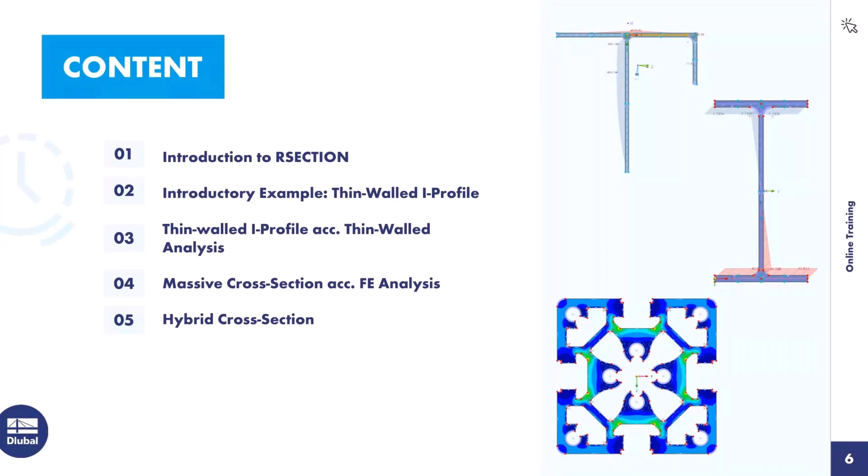So, Sonja, just an interruption. We can see the PowerPoint slide and not the RSECTION window. Ah, I will share the other screen. Ah, that's quite better. Thank you. Okay, sorry for that.

Here on the left are the navigators, and the first navigator is the data navigator. The data navigator manages the input data. A double click on an entry opens the dialog. I can show you this now. If I double click on the point, then the dialog for editing the points will open. However, the dialogs for creating objects can also be called here. Just right click on points, for example, and then it's possible to create a new point.

The display navigator controls the graphical display in the working window. If the checkbox in front of an entry is unchecked, this object is hidden in the graphic. If I uncheck the points here, then you will see that the points will not be displayed anymore. If I check it again, the points will be shown.

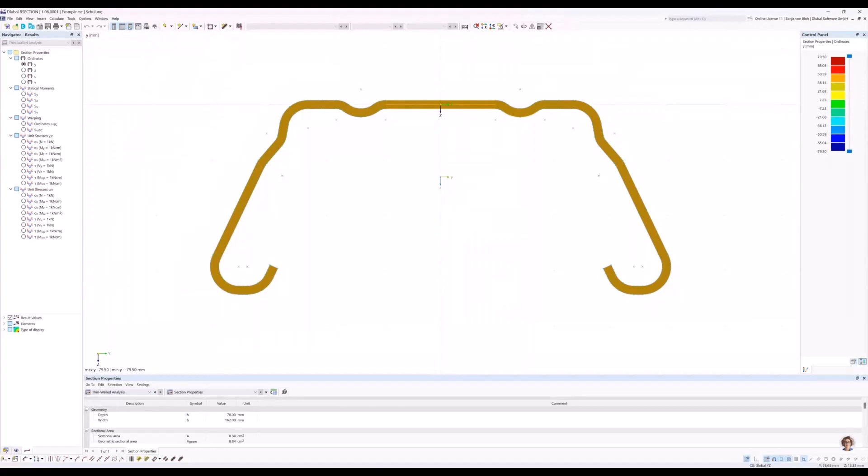Here, I select the whole part. And to remove objects from the selection, hold down the Shift key. Here, I deselect the part. For the first part of the training, I'm now starting a survey again.

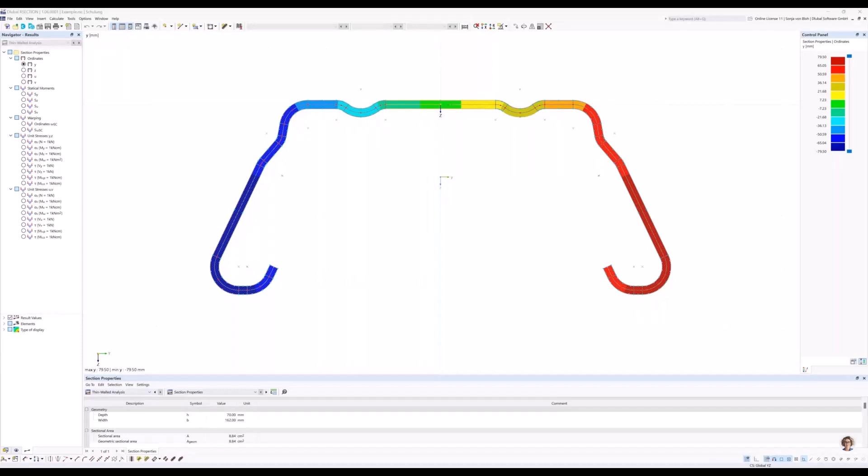Sonja, sorry for the interruption again. Would you like to show the PowerPoint slide or RSECTION? I just wanted to show, maybe there's a problem with which monitor I share. So maybe...

Yes, you should see now the dialog to edit the base data, so maybe it's a problem. You should see it now. Yes. Thank you, sorry. Okay. We changed our training interface now, so I apologize for this. I have to learn it. Okay.

Okay, I've chosen the analysis method thin-walled analysis here, and I've activated the add-on effective steel aluminum section, and I've chosen here the standard Eurocode 3 Part 1.1.

The selection of the design method or standard is irrelevant when using the cross-section in RFEM or RStab. You can select the design method in RFEM RStab regardless of what is set in RSECTION. Furthermore, the subpanels are generated in the design modules based on the standard selected in the design add-on.

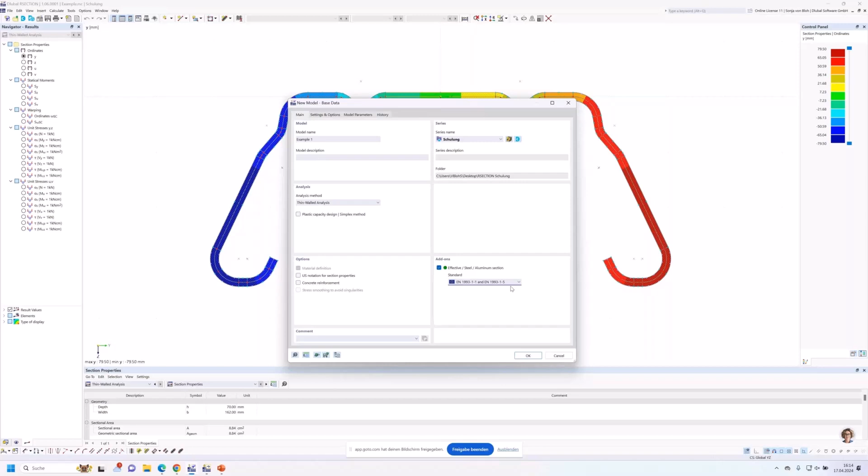On the steel design add-on, the manufacturing type determines which part of the standard is used for the design. You can select the manufacturing type here, and here it's also possible to define the buckling curves.

For cold formed sections, the standard Eurocode 3 Part 1.3 is used, and for hot rolled or welded sections, the standard Eurocode 3 Part 1.1 is used.

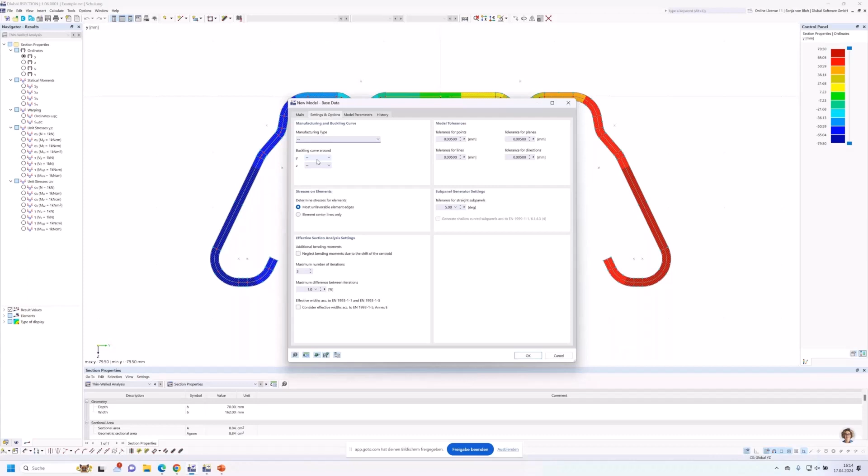Then I click on OK, and the new file will be created. I first define the material.

For this, I go to the navigator data, and materials have already been defined, and I double-click on this material to modify it.

I can create or copy another material in the list here on the left via these buttons: create new material, or copy selected materials, or I can also delete the selected materials. I can enter a material name directly here in this box.

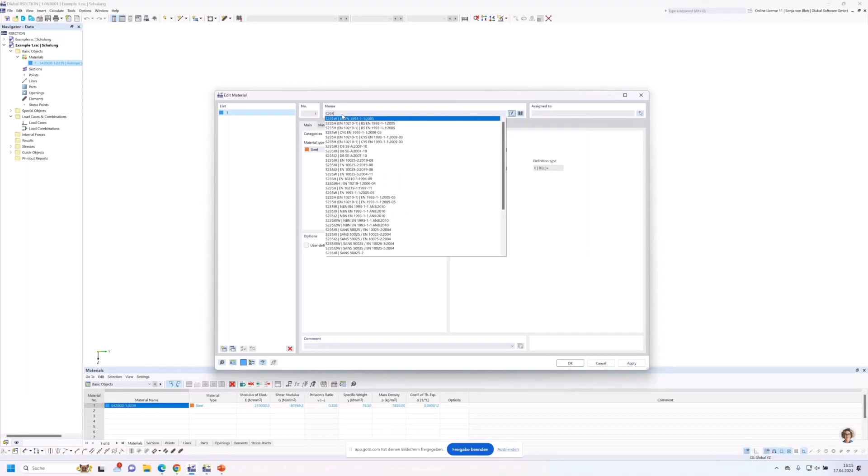For this, I activate this button, user defined material, and if I do so, I can enter a name, and RSECTION then lists all materials that match that name.

But I can also open the material library for a specific selection, and to do this I have to click on this button, import from material library. In the material library, filters are available here on the left to quickly find the material. I can filter by material type, I can filter by the standard, and it's also possible to search for a material by its name if I enter the name here.

I want to use an S235 from this standard. Here I choose this material and then I click on OK.

If the material is not in the material library, I can create this material by activating the user-defined material checkbox. I can adjust the material values in this tab if I want to. I don't want to use this now, so I uncheck this checkbox again. Then I click OK.

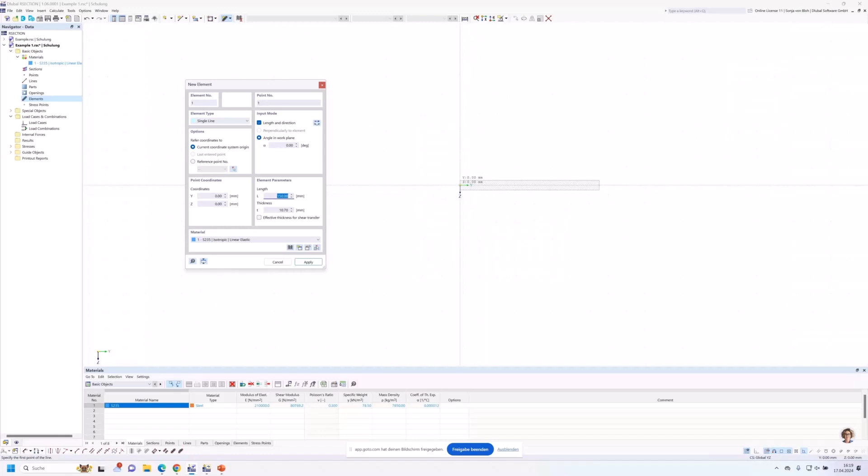So I use the graphical input, and here I choose single. I'll enter the bottom flange here first, using the input mode length and direction. I can also define an angle on the work plane. This angle should be 0 degrees, and I define the length here. This should be 150 millimeters, and the thickness should be 10.7 millimeters. Then I place this element by clicking with the left mouse button.

Then I create the web. Elements must be connected for the calculation of the effective cross-section. The connection is made via the start and endpoints of the elements. If two elements share the same points, they are connected.

I use here also the input mode length and direction, but the web has an angle on the work plane of about 90 degrees, and it has a length of 289.3 millimeters and a thickness of 7.1 millimeters. Then I want to reverse the direction, and I choose this point.

Then I create the left flange. For this I use also this input mode. Angle on work plane is 0 degrees. The length is 75 millimeters and the thickness is 10.7 millimeters.

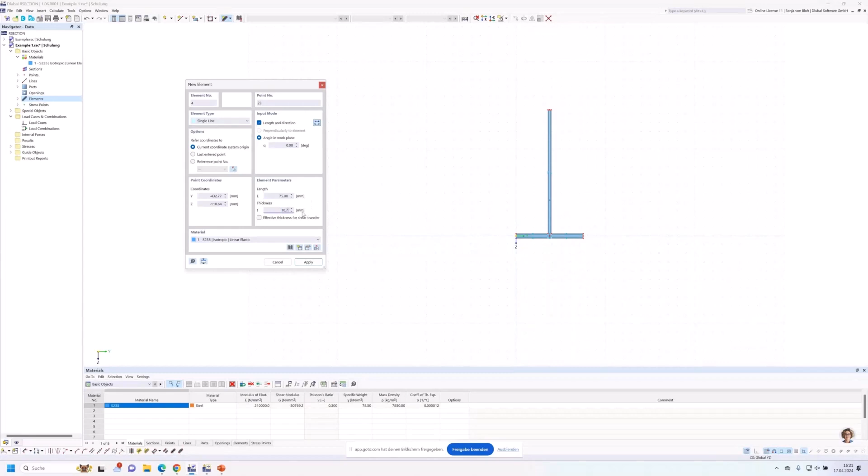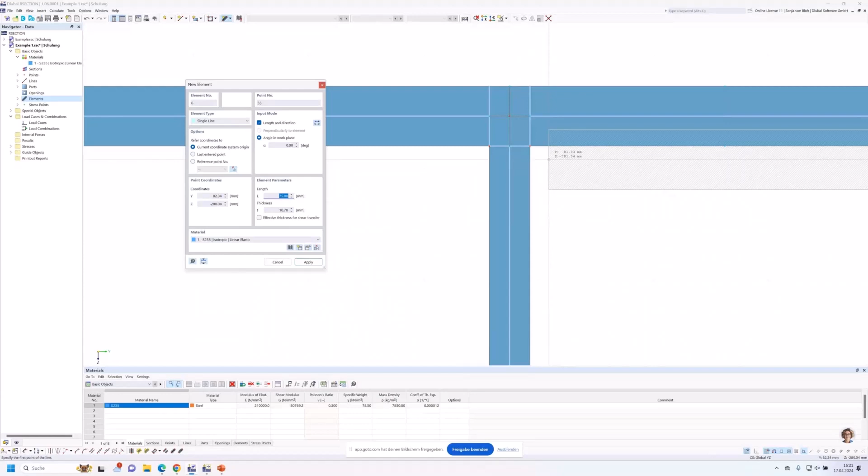Then I reverse the direction, the orientation of the element, and then I create the right flange. To close the dialog, I can click on the right mouse button.

The cross-section should be a rolled T profile to which a lower flange is welded. The round radius is 15 millimeters. I can define lines to create them or use the create round corner function.

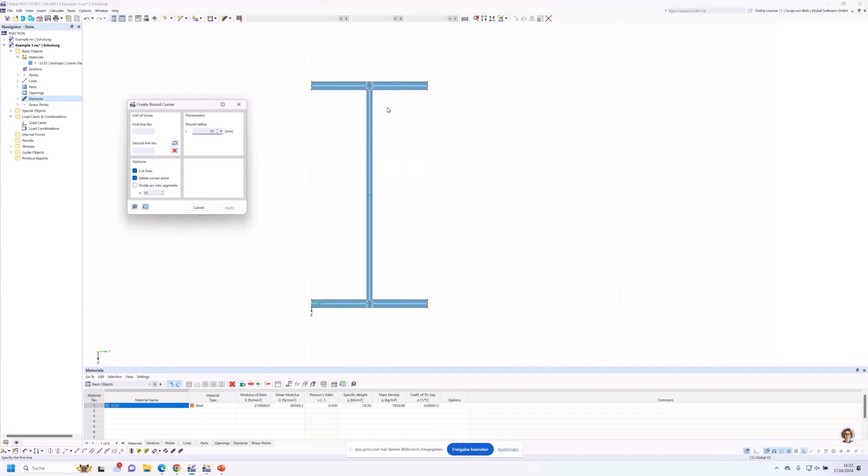In this case, I create the round radius using the function, found here in the bottom: create round corner. Then I have to define the round radius. It's 15 millimeters, and then I have to click on the relevant lines. Then I click on the right mouse button to close the dialog again.

The lower flange is welded with a 6 millimeter double fillet weld. I create the welds using the create angled corner function, found here in the bottom. Here I have two corner types, both edges, and edge and angle. Here I choose the corner type edge and angle.

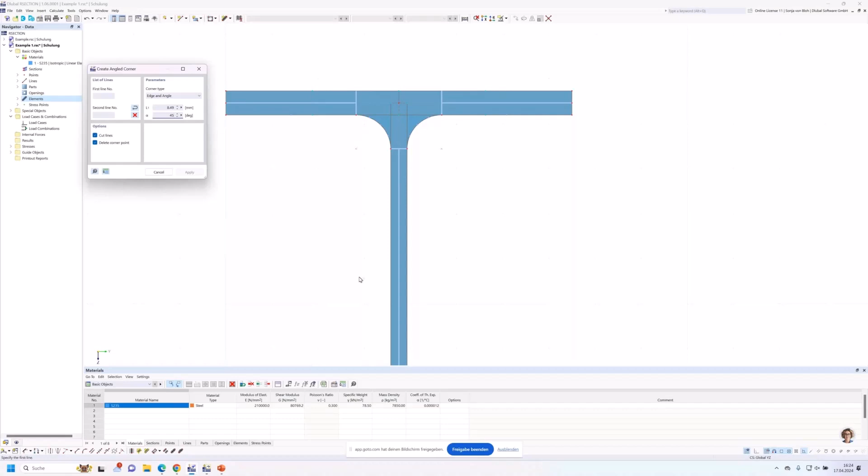You can also calculate within the dialogues. So I define here 6 multiplied by square root of 2, and the program now calculates the lengths L1 to 8.49 millimeters. Then I have to define the angle. It's 45 degrees. And then I have to click on the relevant lines here in the bottom. With the right mouse button, I close the dialog again.

The sub-panels that you can see here are automatically generated based on the standard selected in the base data dialog. These cannot be changed. If no elements are defined, a cross-section classification in RSECTION and the design modules of RFEM or RStab is not possible, and neither is a calculation of the effective cross-section possible. In the design add-ons, this cross-section is then designed according to cross-section class 3.

I would also like to use this example to show you how to calculate stresses and the effective cross-section. In order to calculate stresses or the effective cross-section, a load case must first be created. Load combinations can also be formed.

First, I create a load case via this navigator data. Here, I right-click on load case, and I choose new load case and combination. Then I give the load case a name. This is called N, and then I want to create a second load case, which I do by pressing this button, Create New Load Case, and I give this load case the name MY.

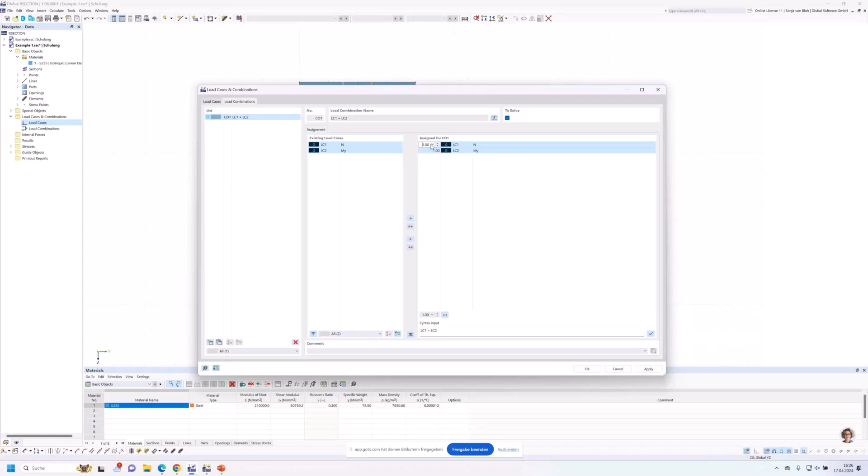I want to create also a load combination. To do this, I click here on New Load Combination, and then I choose the relevant load cases. If I want to choose all, I can click on Add All. It's also possible here to change these values. Then I click on OK.

Then I have to define the internal forces. The internal forces can then be defined manually or imported from RStab or RFEM. Only an import from RStab 9 or RFEM 6 is possible, and the file must be saved with results.

I define the internal forces manually today. To do this, I go to the navigator data, open the tree internal forces, and double click on internal forces to open the dialog. Here I define an axial force of minus 10 kilonewton. Compressive forces are negative, tensile forces are positive. The axial force acts in the center of gravity of the cross-section.

Then I click on Apply and Next, and I choose the second load case, MY, and here I want to define an axial force of 0 kilonewton, and a bending moment of 100 kilonewton. I don't want to define it in kilonewton centimeter, I want to define it in kilonewton meter. I can add this manually, but it's also possible to change the units and decimal places.

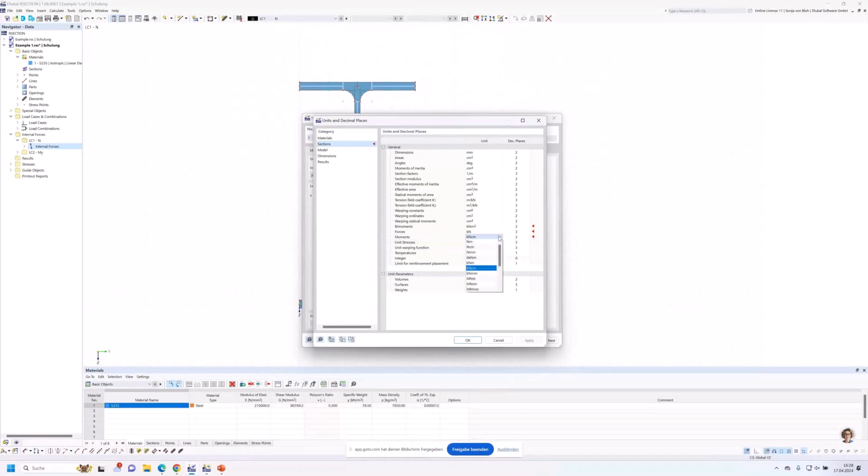And I want to do this now. So I choose here kilonewton meter, and then I define here 100 kilonewton meter. Then I click on OK.

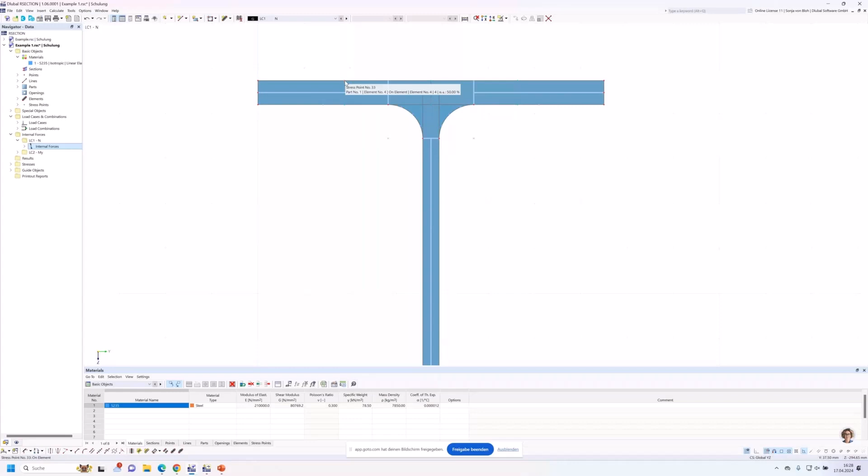The blue dots that you can see here are the stress points. Stresses are calculated and displayed at the stress points. The stress points are generated automatically, but stress points can also be defined manually. I want to do this now here.

To do this, I go to the navigator data again, and I right-click on stress points and choose New Stress Point. I define the stress point number, this should be 100, and I define the stress point coordinates, this should be 75 millimeter and minus 100 millimeter. Then I click on OK, and this stress point is generated here.

Which stresses are to be calculated and output in tabular and graphical form can be set in the stress configuration. You find the stress configuration also here in the navigator data, under Stresses, Stress Configuration. Double click opens the corresponding dialog, and here you can activate or deactivate a checkbox for which stresses have to be calculated. I'm satisfied with the default setting, so I click here on OK.

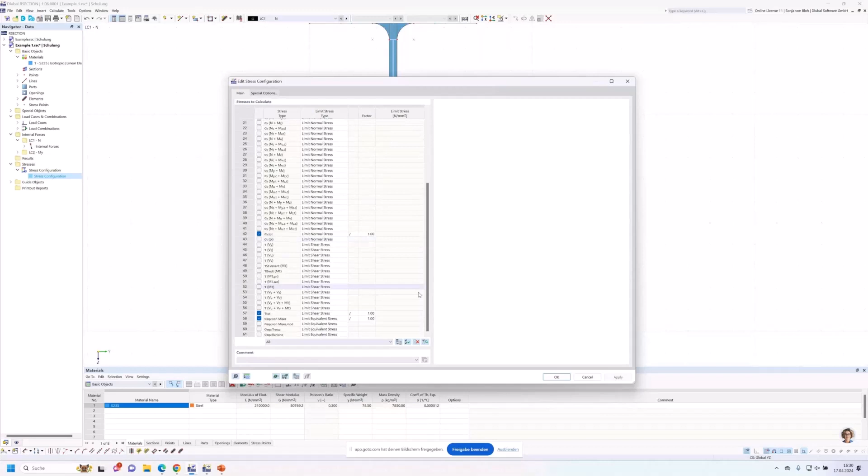Then I start the calculation now. I click here, Calculate All, and now the cross-section properties and stresses are calculated.

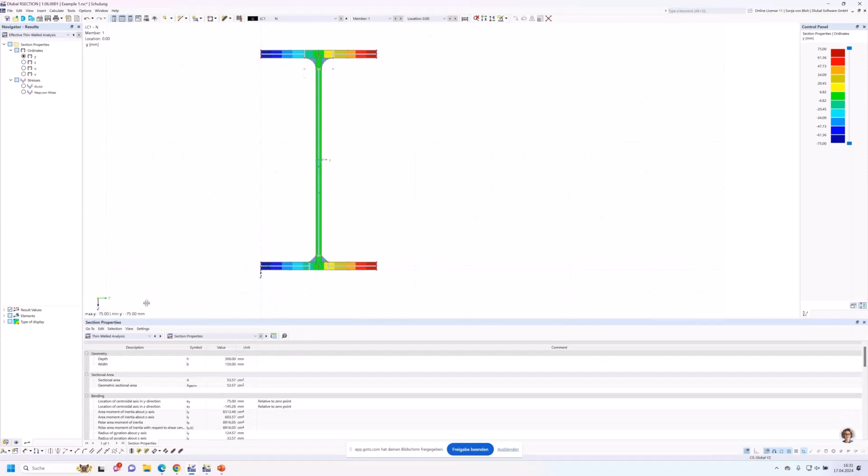In the results navigator, you can switch between the gross cross-section and the effective cross-section. Here, thin wall analysis is for the gross cross-section and effective thin wall analysis is for the effective cross-section. The same is possible in the table, you can switch between thin wall analysis and effective thin wall analysis. It's also possible to switch between the load cases and combinations.

I choose here load case 1 for compression, and I check the thin wall analysis, the gross cross-section properties, and here sectional area is calculated, bending area moments of inertia about y-axis and z-axis are calculated. Here I can see that the sectional area is about 54 square centimeter. If I choose here the effective thin wall analysis... I see it here now.

It's the same. This should be different. Maybe I did an error for the material. I think a different material should be used here, but it's good to show you how you can add the material that you have defined.

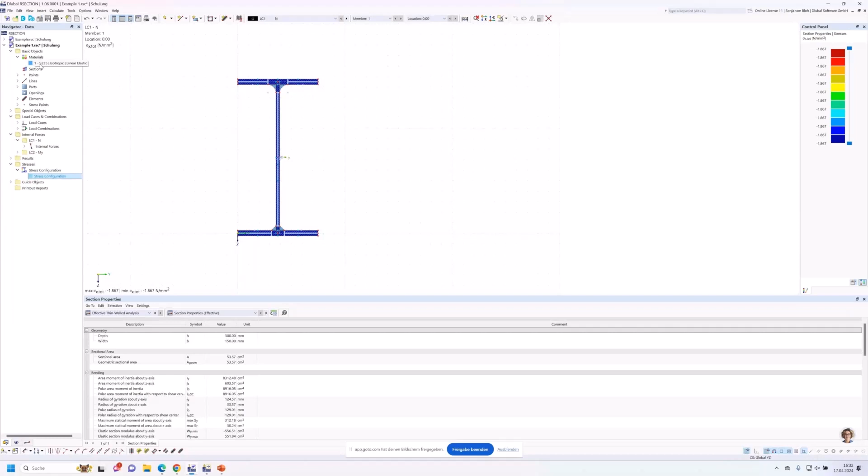To change the material, you can double click on this material, and then I open the material library again, and instead of an S235, I wanted to use an S355 material. Then I click here on OK, and I start the calculation again, and now I get the expected results. You can now see that the sectional area is about 52 square centimeter, which is lower than the sectional area of the gross cross section.

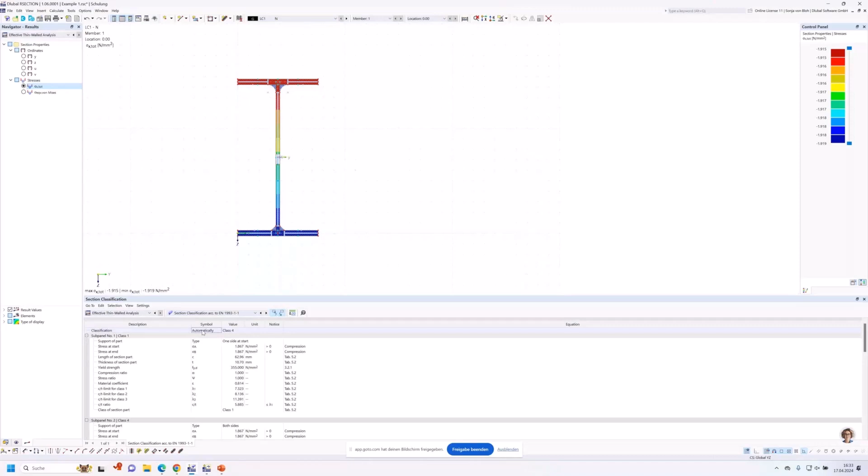This cross-section falls into class 4, and the classification you can see also here for the effective thin wall analysis, the section classification, and you can see here the cross-section is classified as class 4. And you get here detailed information about the classification, and you see here that this subpanel, you can select it, falls into class 4, it's the web. And here you can see also the reduction due to local buckling.

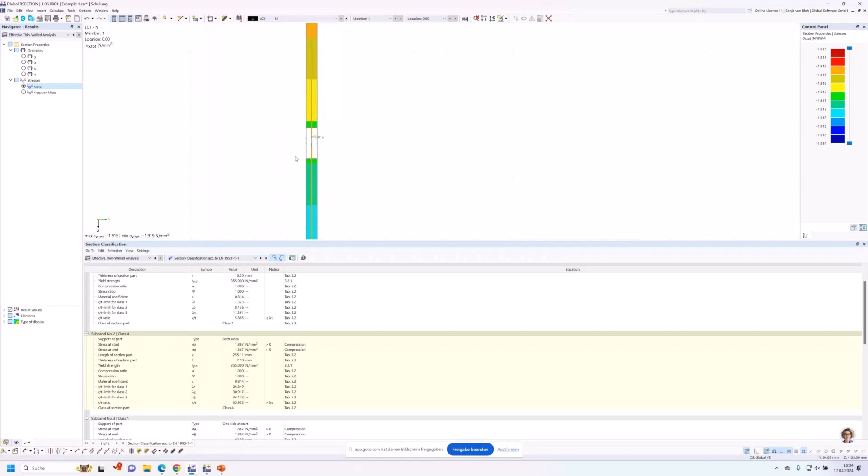I want to show you that you can change the type of display. Now isobands are defined here, and I can turn it off. And now the stresses are shown in a different way.

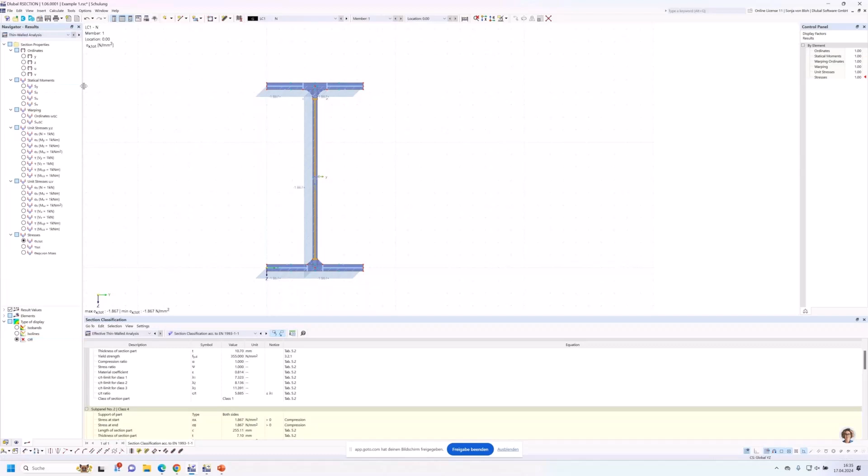It's also possible to view the statical moments graphically and numerically on the tables. You can select statical moments and warping, and it's also possible to see the numerical results of the stresses. I want to show this here.

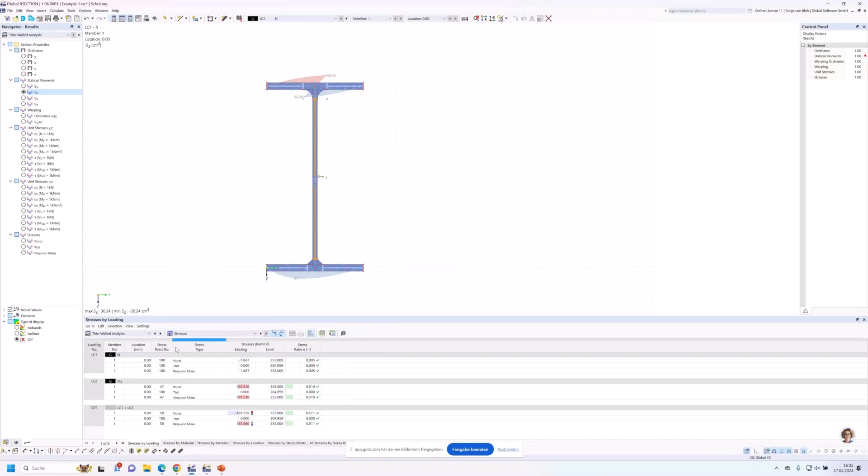I choose the stresses, and it's also possible to show the stresses by stress points. We have created stress points, but I don't see it because of the subpanels, so I deactivate the subpanels. Then I click on the manually defined stress points, stress point number 100, and you can see here the results of this stress point.

I'm now starting a survey again regarding the requirements for a cross-sectional classification. Multiple selection is also possible.

Unfortunately, now I have problems with my mouse, but now it works. Now I launch the poll. Now I end and share the results.

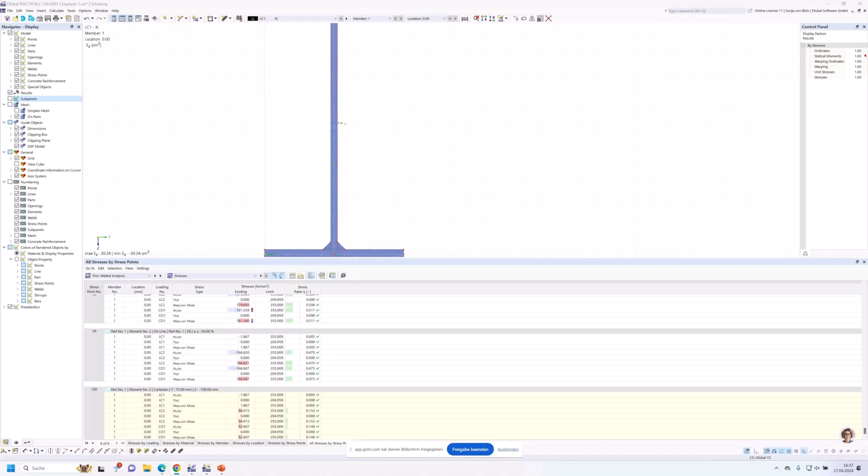I would now like to use another example to show you how you can access cross-sections from the library and modify them. For this, I create a new file via this button, New Model, and I name this file example2.

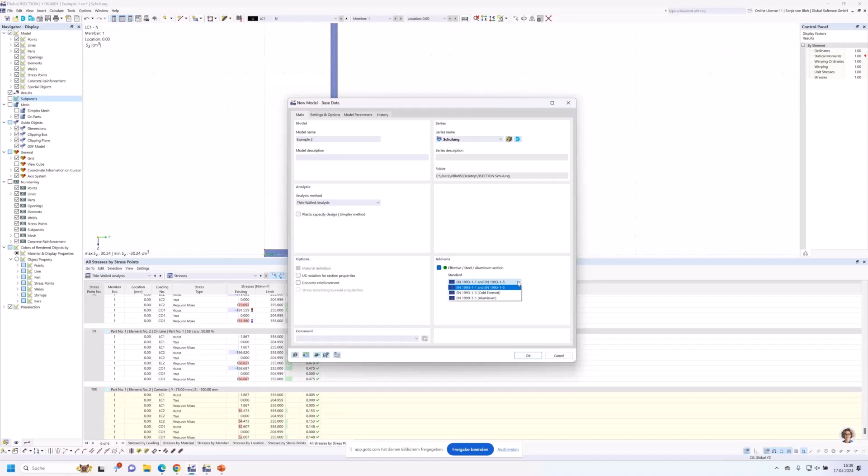I select the analysis method, thin-walled analysis, and I activate the calculation of effective section according to the standard Eurocode 3 part 1.1. Then I click on OK.

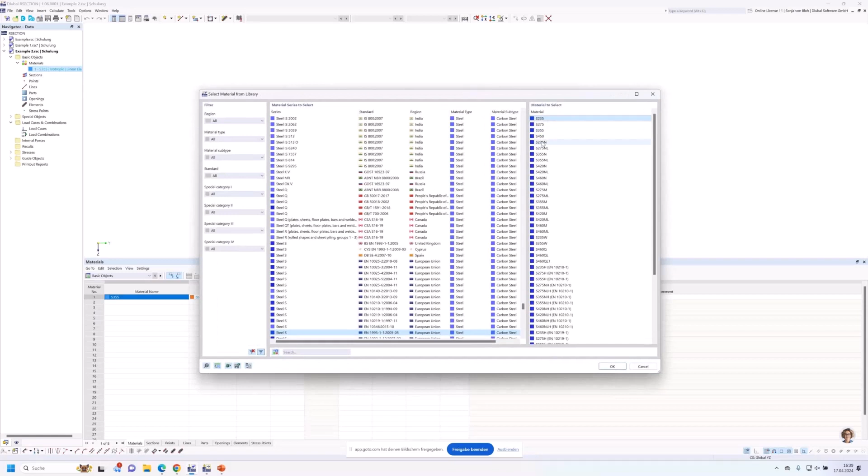I go to the navigator data, and then I define the material. For this, I double click on the material that's already defined, and I want to create an S235 material. I import this material from the library, choose the desired material, and click on OK.

Then I insert a cross-section from the cross-section library. To do this, I go to the navigator data again, right-click on section, new section. The window is structured like the material window. A cross-section can be created or copied via the list, via these buttons at the bottom.

I can also enter the name directly here, or it's also possible to open the cross-section library via this button. A large number of cross-sections have already been entered into the library, and I choose an I-profile here.

And here I have also filters. I can filter the manufacturer or the standard and so on. And here a search option is also available, and I want to use this now.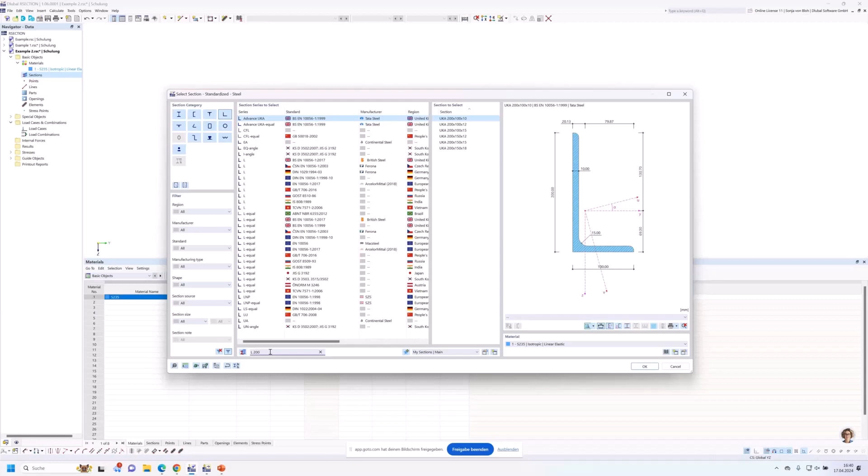I enter here L200, X150, X12, and I choose this cross section and click on OK.

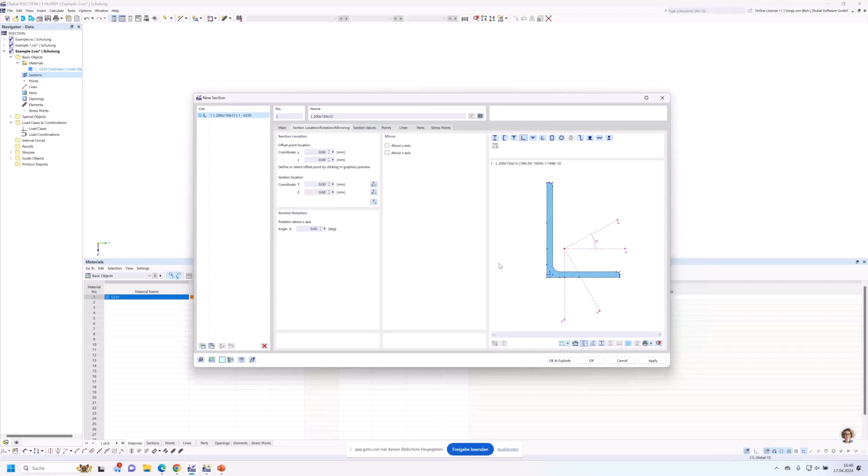The angle should be mirrored around the y-axis. That's why I activate this checkbox, and it should also be rotated by 90 degrees, so I define 90 degrees here.

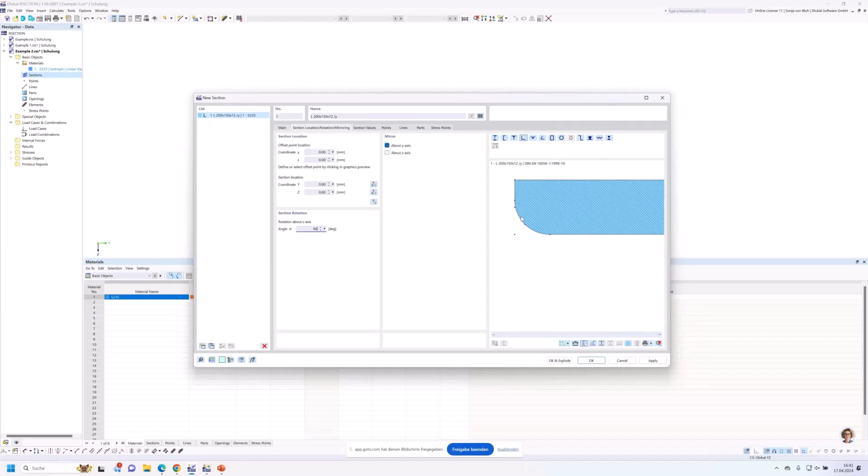Furthermore, I select the offset point on the graphic. To do this, I zoom into the graphic and select this point. At this point, the cross section is placed at the insertion point.

The insertion point can be defined here. I then pick the insertion point in the working window, and I will do this here. Then I click on OK.

When inserting this thin-walled cross-section, two elements have been defined. You can see this here, and also the part is created.

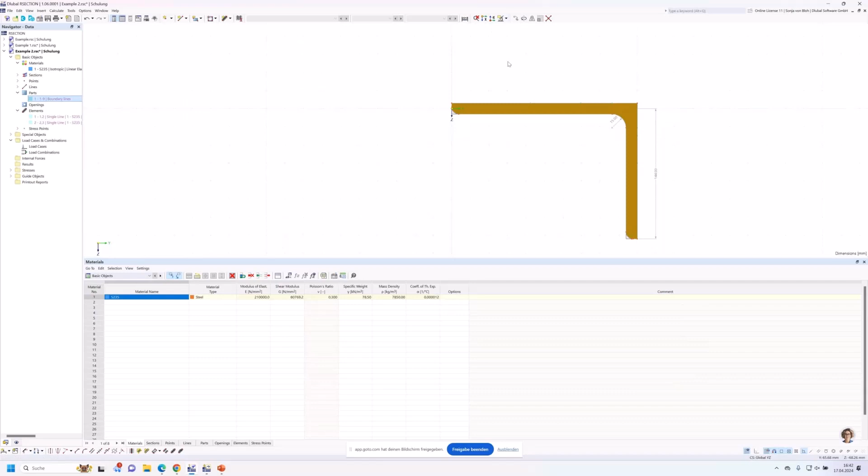The cross-section can be subsequently edited, moved, mirrored, or rotated via these options. It's also possible to open the edit section window again by double-clicking on the section.

However, in order to modify individual objects such as points or lines, the cross-section must be split. The cross-section is to be supplemented by further cross-section parts.

I therefore split the cross-section into its individual parts for further processing. To do this, I right-click on this section and choose section explode.

The fillet isn't needed, so I remove this by clicking on the delete button.

I also add more elements. I insert an element here via the graphical input. I choose single, and I choose the input mode length and direction.

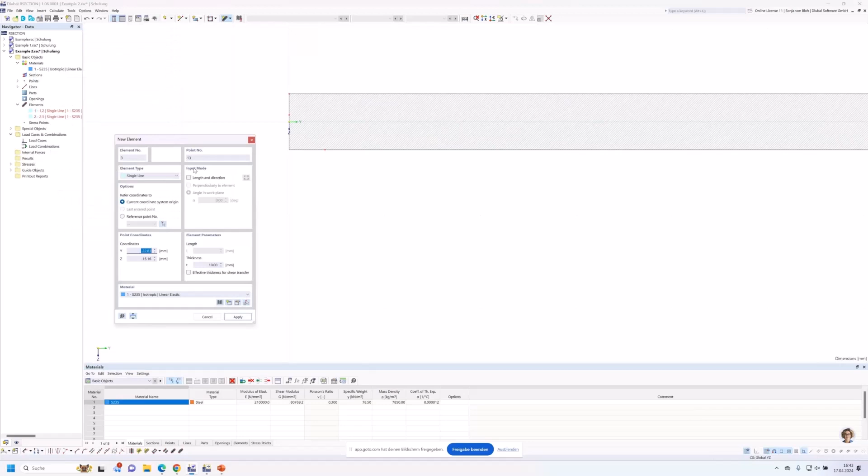Here I have to reverse the orientation, and then I define a length of about 200 millimeters and a thickness of about 12 millimeters. And then I click on this point.

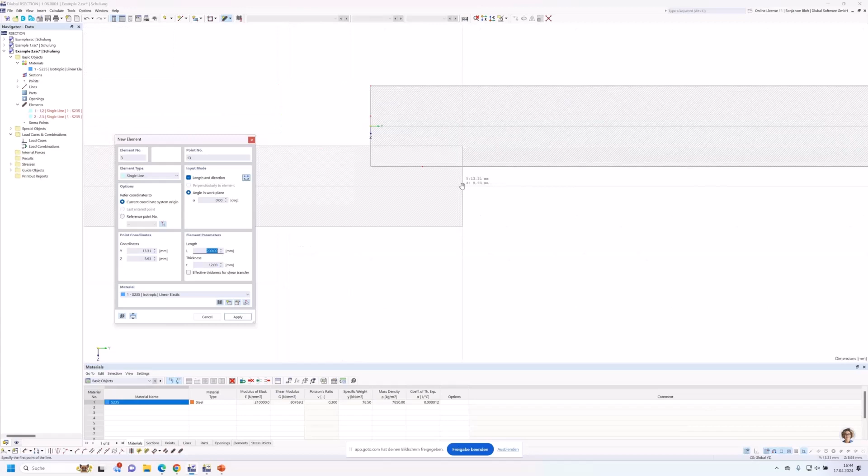And another element has to be created. So I want to create the web now. For this, I choose the angle on a work plane of about 90 degrees.

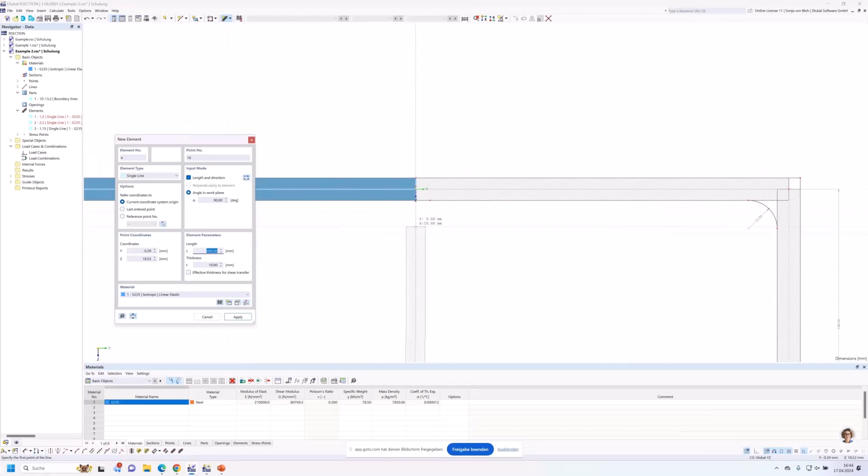Then I have to reverse the orientation again, and I define a length of about 400 millimeters and a thickness of 10 millimeters. And then I click on this point.

I also delete unnecessary lines. Here's a line. To see it better, it's possible to deactivate the elements and the parts. Then you can see here's a line that I don't need, so I can delete it. I don't need this line either, so, sorry, let me undo that.

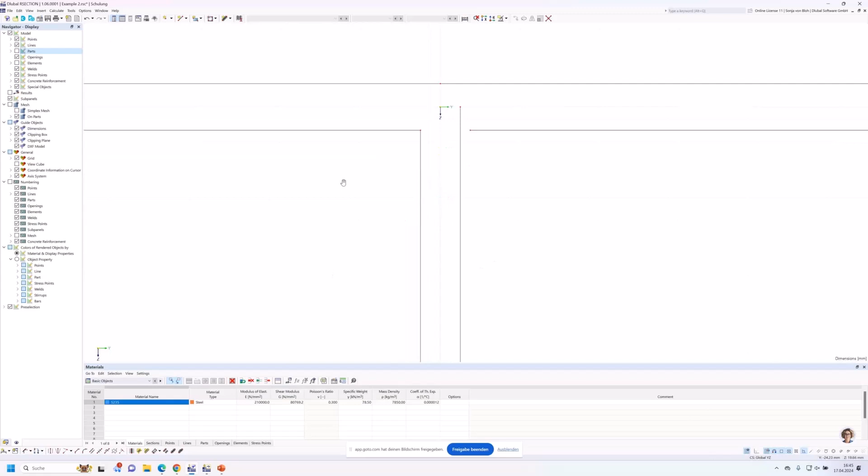Welding seams should also be taken into account in the cross-section values. I create the welds using the angled corner function that I used before in the past example.

I choose this function, create angled corner, and select the corner type edge and angle. I define a 6 mm double fillet weld, so 6 multiplied by the square root of 2. I set the angle to about 45 degrees, and then click on the relevant lines.

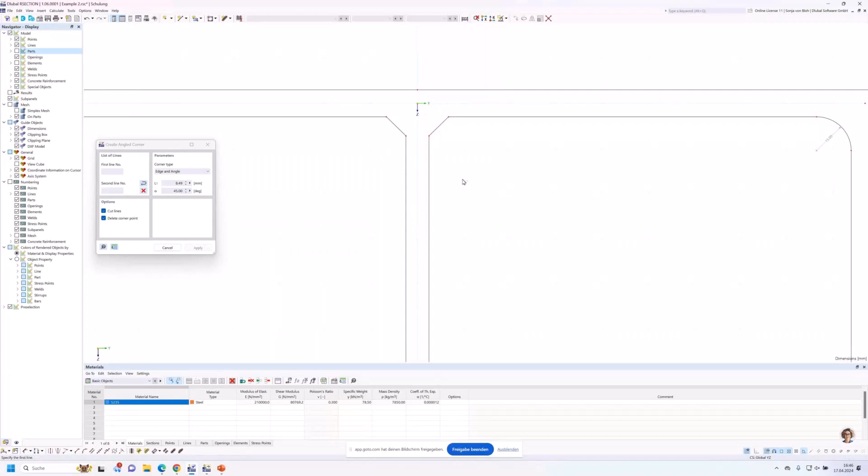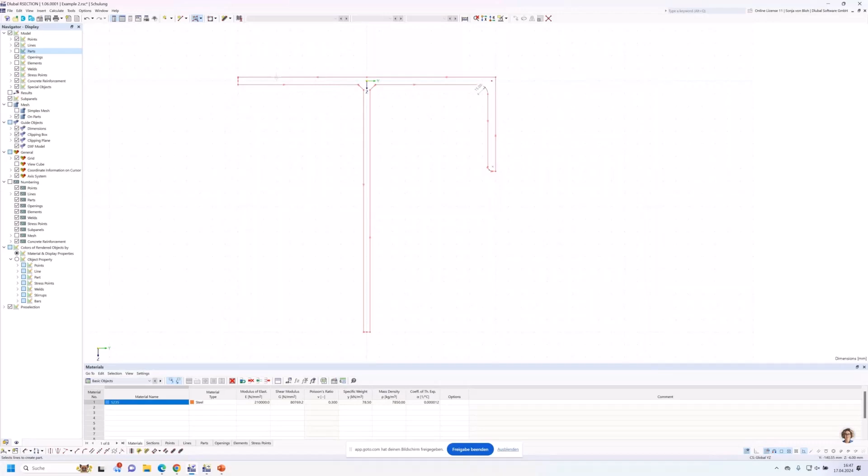Furthermore, I still have to create the part by selecting the lines. We have a function called select boundary. I click on OK, then click on line, and now the program recognizes that the polyline is closed.

I would now like to calculate the effective cross-section and the stresses so that I can create load cases and internal forces. For this, I define the load case first.

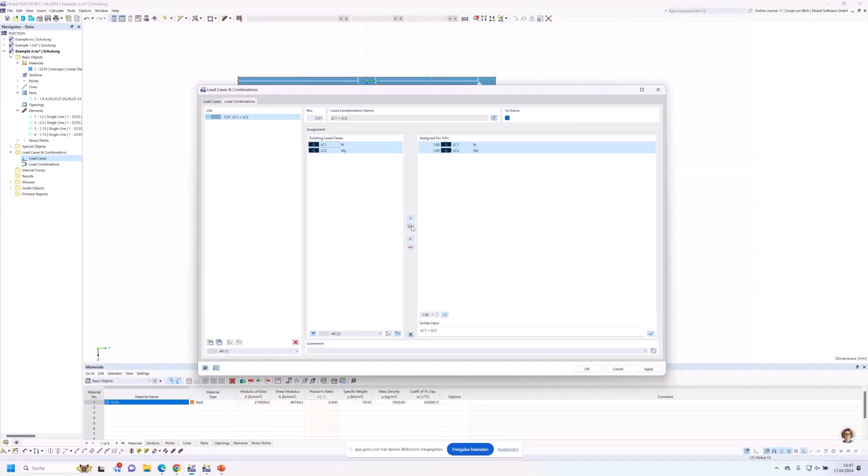I go to the navigator data, right-click on load case, choose new load case, and name it N. Then I create a second load case, MY, and I also want to create a load combination. I click Add Load Combination and consider both load cases, then click OK.

Then I have to define the internal forces. In load case 1, I define minus 50 kilonewton, apply, and next. In the next load case, I define an axial force of 0 kilonewton and an MY of 20 kilonewton meter, then click OK.

Then I start the calculation and want to see my results. I can see the effective cross-section now, and this cross-section is also reduced because the web here and the flange here fall into class 4.

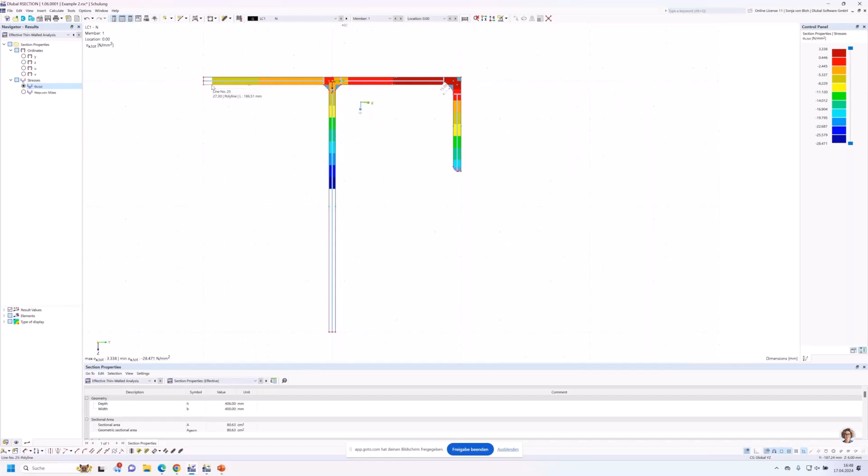I can control this also on the table below. Go to the section classification, then click on the sub-panel. I can see here that this sub-panel falls into class 4. I can also see the details for this sub-panel, which is also class 4.

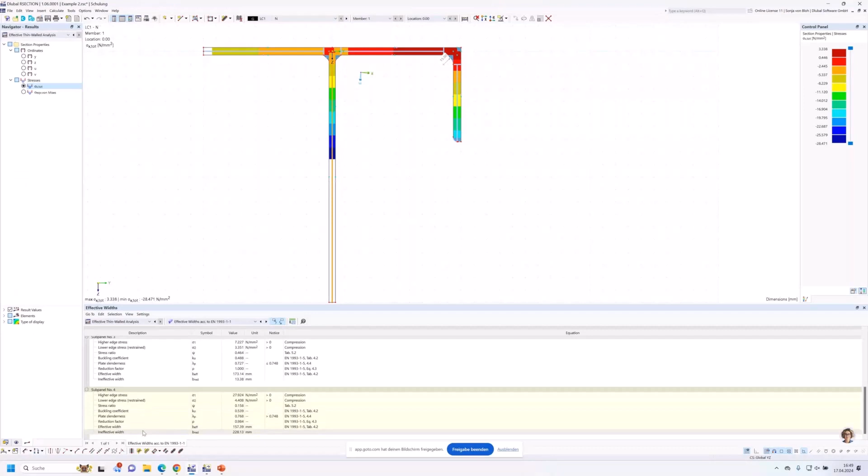I can also see the effective widths for these sub-panels, where I can control the effective and ineffective widths. It's also possible to see the effective cross-section for load case 2, where only this part falls into class 4. I can also control the load combination here.

I want to create documentation as well, and in RSECTION this is called a printout report. I want to show you this now.

For this, I go to the navigator data again, where there is a tree for the printout reports. To create a new printout report, I right-click on printout report and choose new printout report. Then, by activating or deactivating the checkbox in front of the report items, I can choose which items should be included.

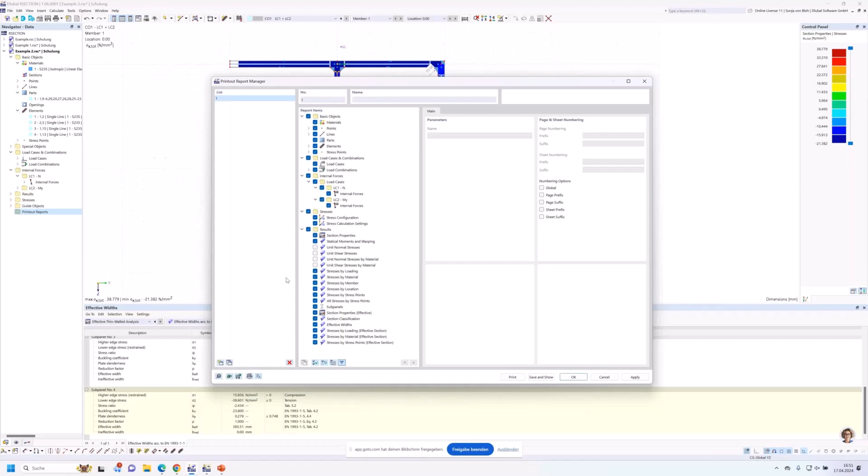I don't want to have the unit normal stresses and unit shear stresses in this printout report, so I deselect those. Then I go to Save and Show, and the printout is created and shown.

It's also possible to insert graphics into this printout report. To do this, I go to this button and choose Print Graphics to Printout Report. Here you have various settings for scaling and so on.

I choose a windows filling here, and then click on Save and Show. Now this result graphic is inserted into the printout report.

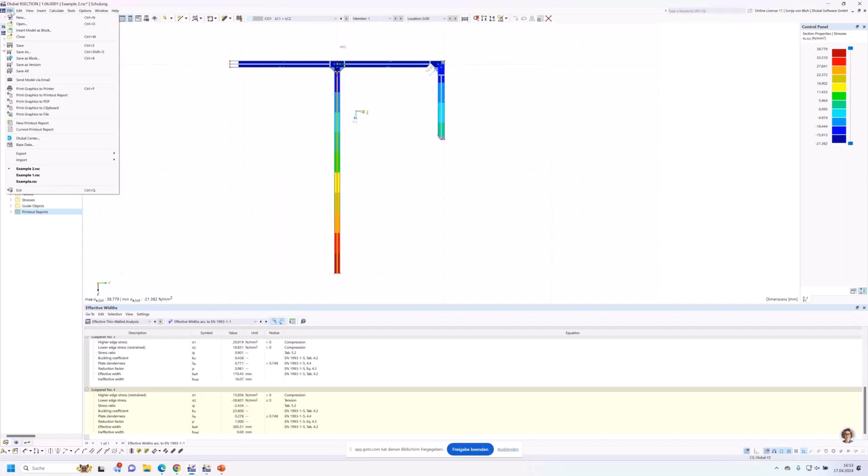In the next example, I would like to show you that you can also create cross-sections by importing a DXF file. The DXF file can be imported via the File menu, File, Import DXF.

Then you have to choose the corresponding DXF file, and click on Open. I don't want to import the DXF file into the active model; I want to create a new one, so I click on No.

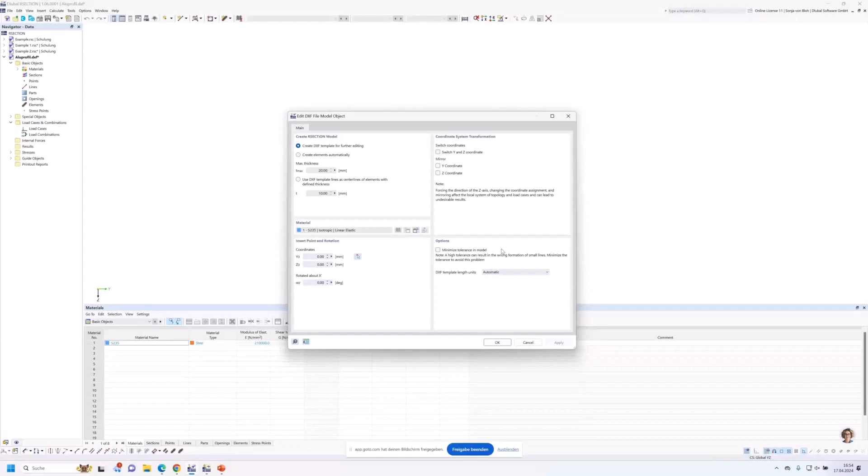In section Create Section Model, you have three options for creating the cross-section. The automatic creation of elements is useful if the outlines of the cross-section are available in the DXF file. RSECTION attempts to create center lines for parallel lines and then set the elements between the intersections.

Only elements that do not exceed the maximum thickness defined here are created. The import function 'use DXF template lines as center lines' is useful if the cross-section geometry is available as a center line model. The lines of the DXF templates are considered as the center lines of the elements. The thickness defined in the field T is assigned equally to all elements.

The third option, create DXF templates, is used for massive cross-sections where no elements need to be created. It can also be used for complex cross-sections where I only want to create elements for the decisive cross-section parts. With this import function, the lines in the DXF file are imported as lines, which you can then use as an aid for modeling.

So I choose this option for the creation of the lines, then I click on OK.

A finite element analysis is to be carried out on the imported cross-section. I control this in the base data. Here, the analysis method finite element analysis is already chosen, so I click on OK.

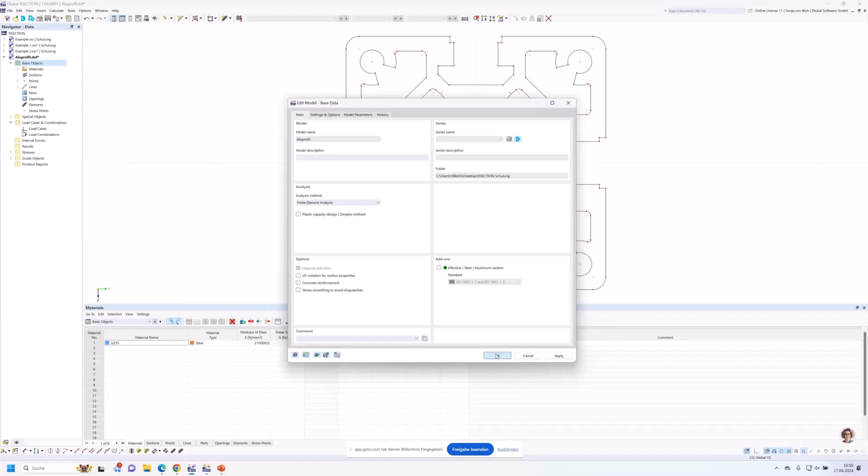A finite element analysis should be performed on massive cross-sections, such as timber or concrete cross-sections, in contrast to thin-walled cross-sections where the stresses can be regarded as constant across the cross-section thickness. The stress distribution in solid cross-sections is variable and can only be determined via a finite element analysis.

Then I define the material for this cross-section. For this, I go to the navigator data again. I double-click on this entry and open the cross-section database, the material database. Here I choose AW6060, and then this material. Then I click on OK and OK.

In a finite element analysis, only a surface needs to be defined. The surface here is called part, and no elements need to be defined. I would only have to define elements if I also want to calculate the effective cross-section or carry out a classification. So I only have to create the part here, and I create this via the function select boundary.

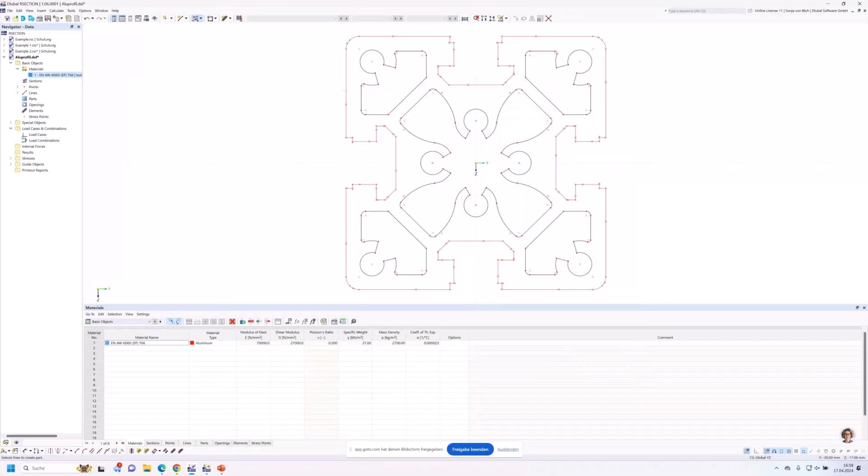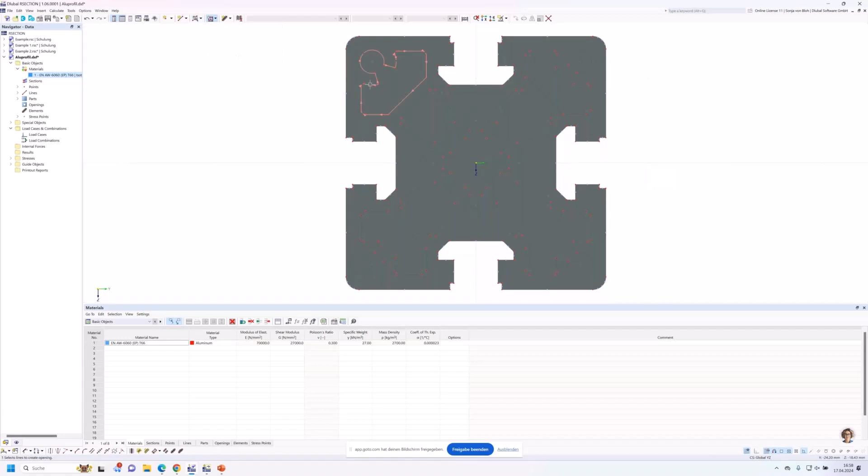Here I click on OK, and then I select the boundary lines. After creating the part, I still need to create the openings. I create the openings also via a function called select boundary for openings, and then I click on the relevant lines.

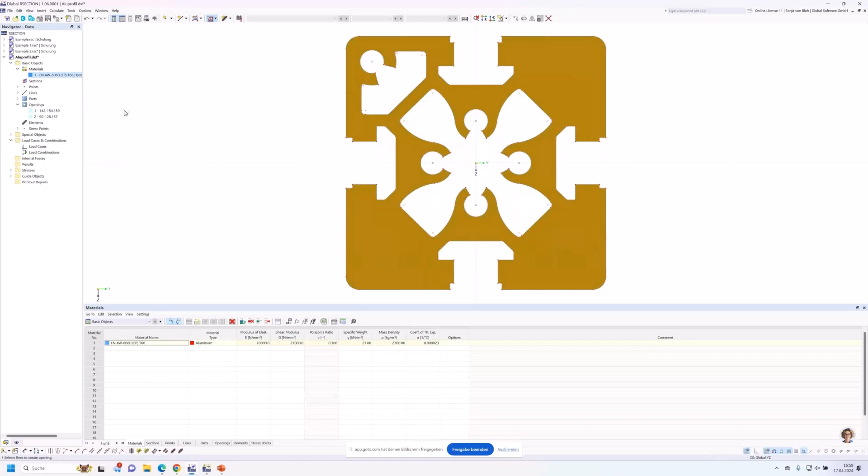It's also possible to click on these lines, but I want to show you an additional function. I can create these openings also by rotating and copying this opening. For this, I select this opening and then I choose the function rotate selected objects.

I want to create a copy, so I activate this checkbox. I want to create 3 copies. Rotation angle is 90 degrees, and I pick the point of rotation, that's here, and then I click on OK. And now the openings are created.

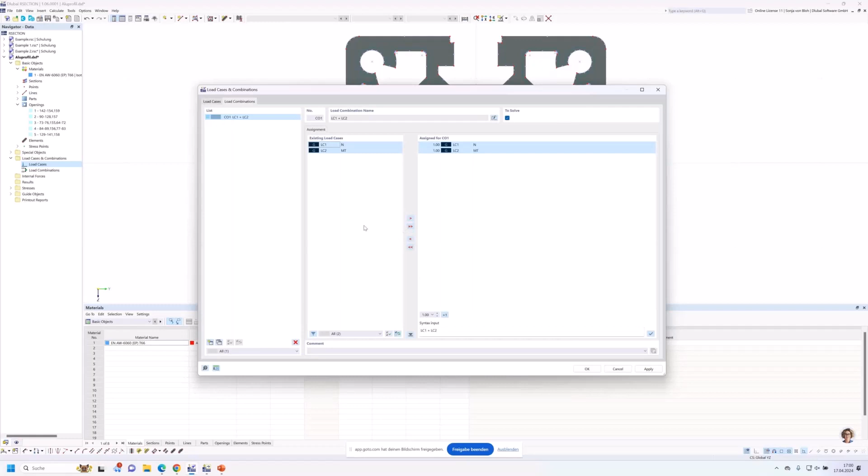I want to calculate the stresses here as well. So I create a load case, new load case. I name this load case N. I create an additional load case, MT. Then I create also a load combination where I want to put in all load cases, and then I click on OK.

Then I have to define the internal forces. I open the corresponding dialog and I define an axial force of minus 10 kilonewton. Click on Apply and Next.

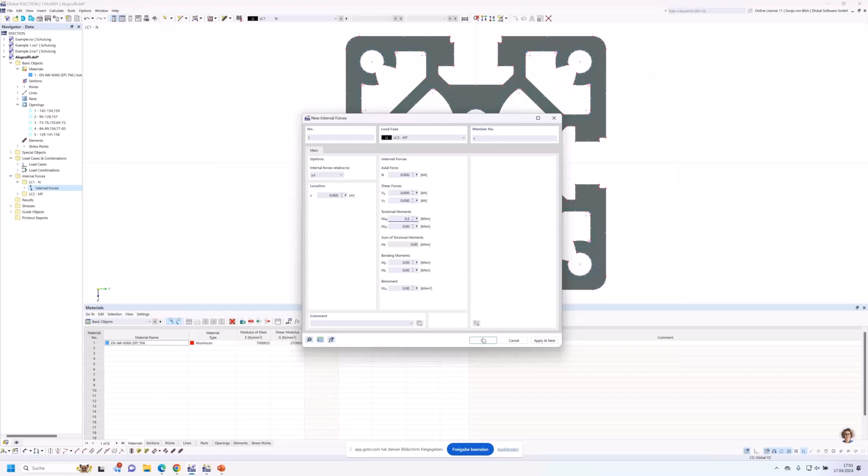I choose then the load case 2. Here I define 0 kilonewton and a torsional moment of 0.3 kilonewton meter. And then I click on OK.

Then I start the calculation, calculate all. And I want to see here the stresses for my load combination. I choose here the stresses that I want to see, and I want to also create a printout report and insert the result graphic.

For this, I go to the navigator data again, right click on printout report, new printout report. I don't want to have the unit normal stresses and unit shear stresses in the printout report, so I deactivate these items. Click on Save and Show.

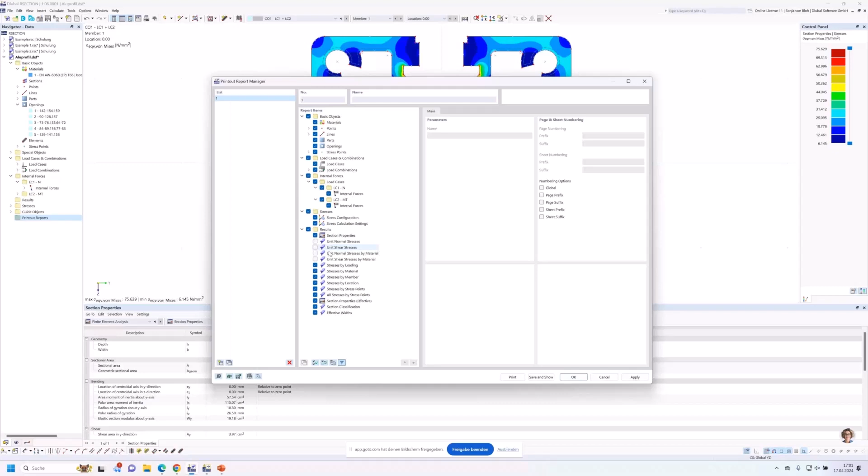And then I want to insert also this graphic to this printout report. So I choose here Print Graphics to Printout Report. Window filling is activated, and then I click on Save and Show. And now I can see here my result graphic is also inserted into this printout report.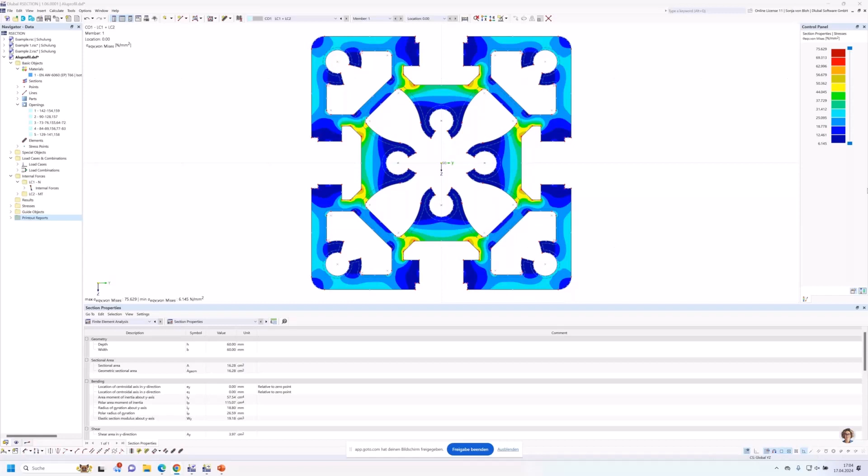For this, I create a new file. I go here to a new file and name this example 4. I choose the analysis method, finite element analysis, and then click on OK.

Then I have to create two materials. First, I create the first material, a steel material S235. I choose this from the material library. I want to have it from this standard. Then I click on OK.

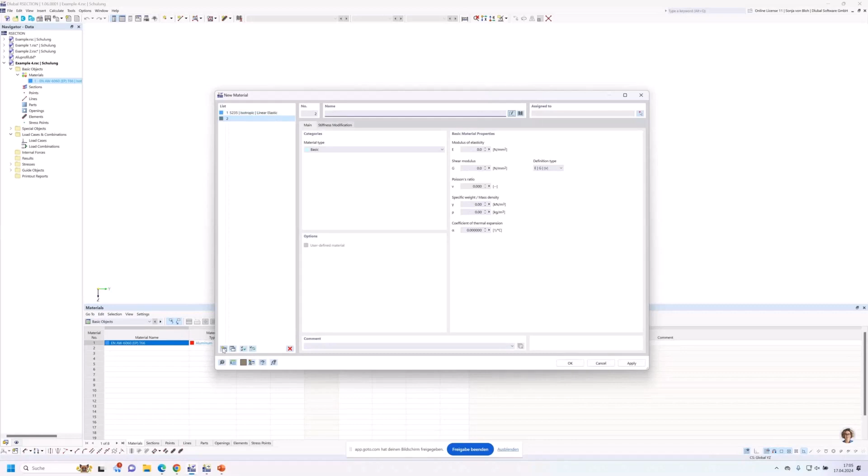Then I need a second, concrete material. For this, I create the second material via this button. Go to the material library again, and enter C40/50, and I want to have this from this standard. Then I click on OK.

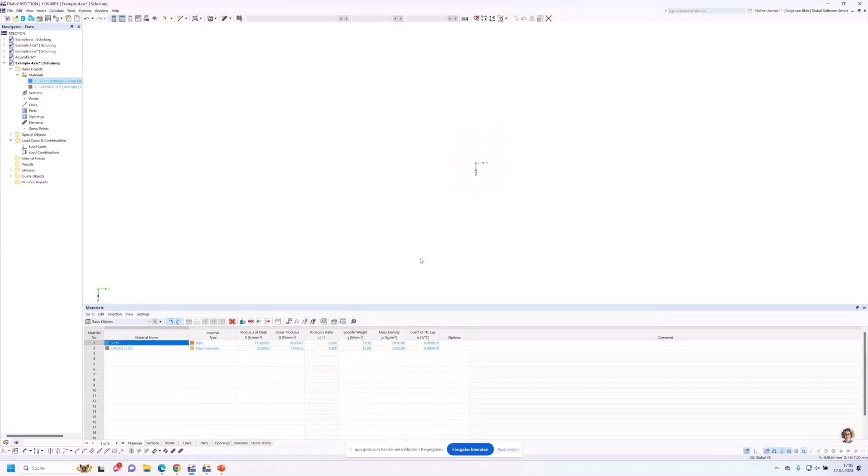First, I model the concrete cross-section with the dimension B x H, 1000 x 200 millimeter. To do this, I choose here the rectangle part. I choose the relevant material, C40/50, and click on OK.

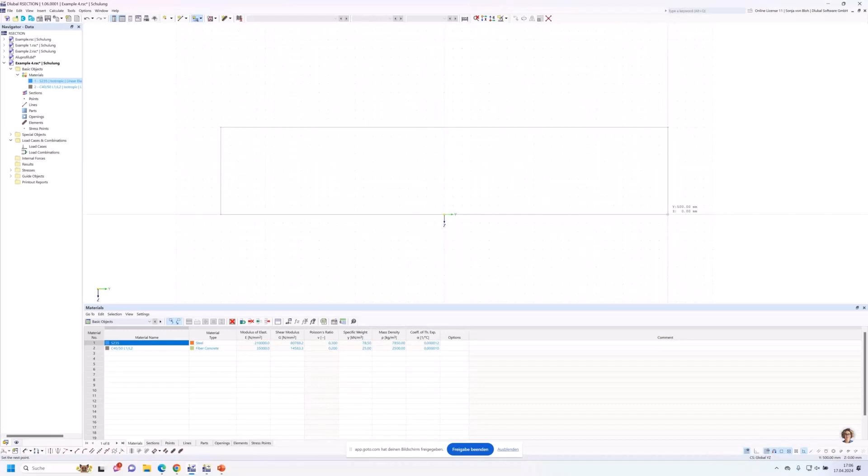Then I zoom into the graphic and I choose here minus 500 millimeter, minus 200 millimeter as the first point, and as the second point, Y 500 millimeter and Z 0 millimeter, and then I close this.

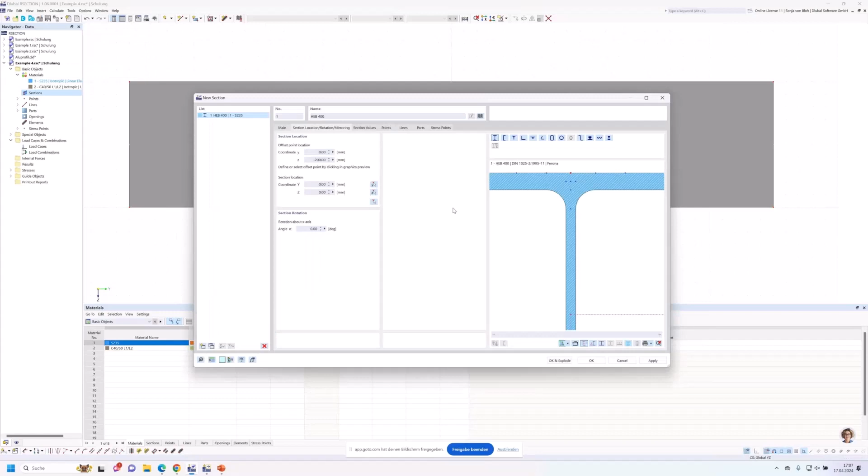Then I create the section. To do this, I go to the navigator data again, right click on section, new section. I open the cross-section library via this button, and choose here HEB 400, and this HEB should have material 1, S235. I click on OK. Then I choose the center of the top flange as the offset point here in the graphic, and I choose this point as the insertion point, and click on OK.

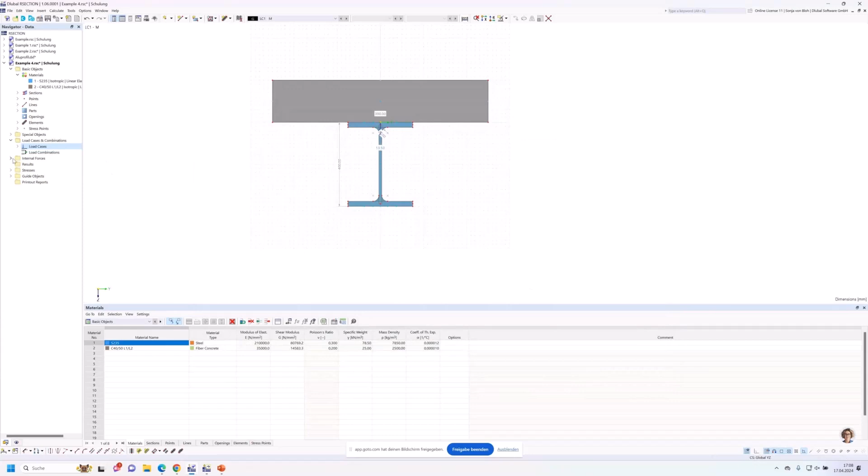I now create a load case, bending moment M. To do this, I go to the navigator data again, new load case, M, click on OK. Then I have to define the internal forces for this load case. I open the dialog again. Bending moment should be 100 kilonewton meter. I click on OK and start the calculation.

I can see also here the stresses, and I would also like to show you how to import the cross-section into RFEM. To do this, I save the cross-section.

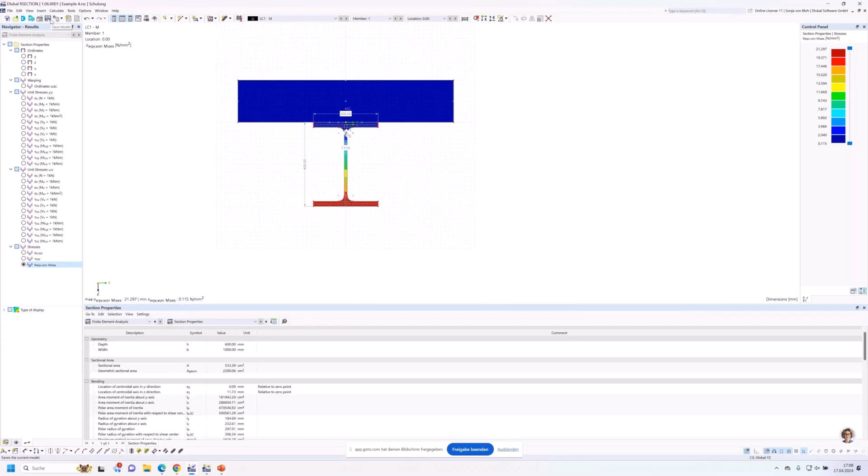I now open RFEM and import the cross-section into RFEM. I've already created a file here, and I go to the navigator data, go to section, new section.

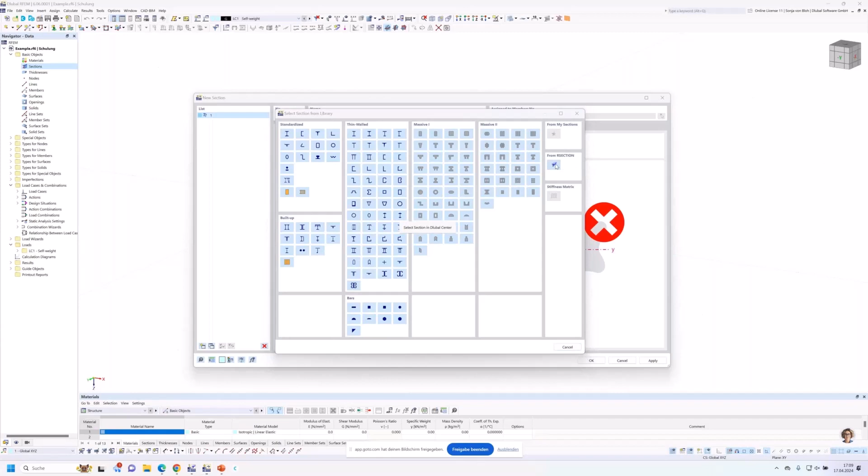Then I open the section library, and I want to import a cross-section from RSECTION. To do this, I click on this button here, and then I choose the cross-section that I want to import.

To do this, it's necessary that the folder is in the project navigator. I've already done this beforehand. If you want to do this, you can add an existing project to the project navigator, or it's also possible to create a new project.

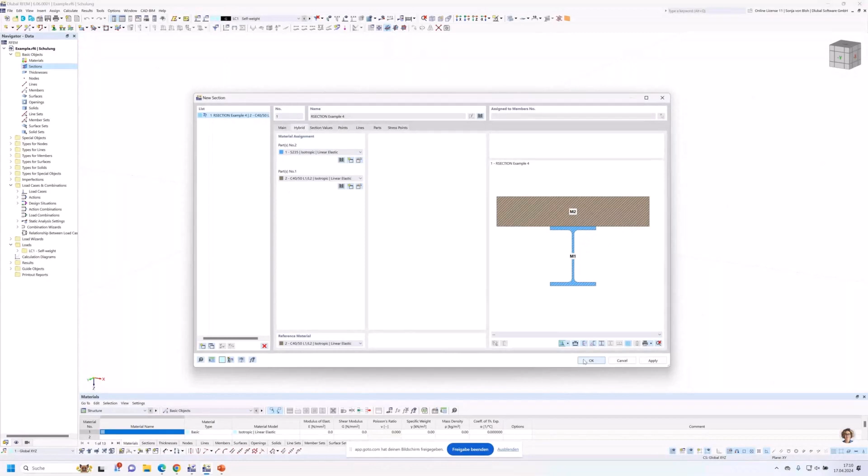I choose here this example 4, click on OK, and now this cross-section is imported, and here the option hybrid is already activated. That means this cross-section consists of several materials, and in the tab hybrid it's possible to assign different materials to the parts if you want to. Then I click on OK, and then it's possible to use this cross-section in a member.

And to create a new single member, I click on New Member. Then I choose this cross-section, and then I can create this member here.

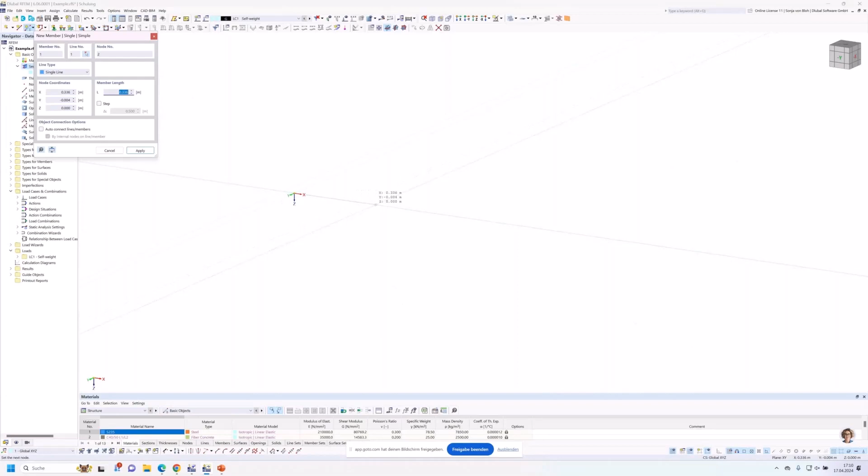With this example, I have come to the end of the training. It was taught how you can create general cross-sections with graphic functions, how you can add cross-section parts to database cross-sections, and create a cross-section based on a DXF import.

Finally, I would like to show you where you can find more information. For this, I go to our website.